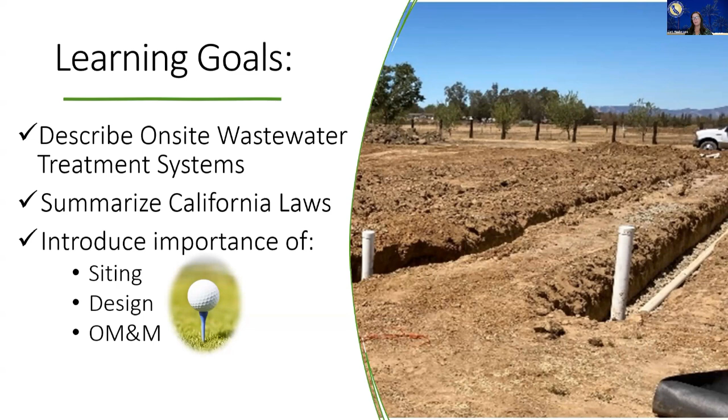So first of all, just quickly, what are they? They are, quite simply, wastewater management systems built to protect people and the environment. They collect wastewater safely. They treat it to a proper standard before discharging it and dispersing it back to the environment as clean water. And as you can see, we have quite a bit of them in California.

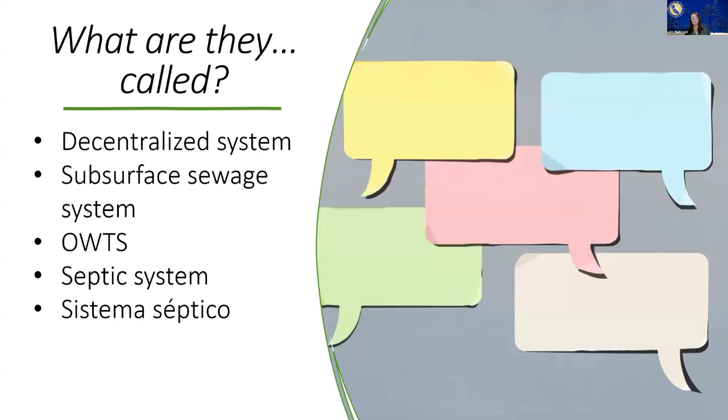And what are they called? They have many names, and this list is not inclusive. But I wanted to let you know that no matter what they're called, they all mean the same thing. Septic system is probably the most common. The acronym OWTS is even pronounced in different ways - OWTS, OOTS, OUTS, OATS. I've heard lots. I pronounce it as OWTS. So you'll be hearing a lot of these different names for this training. But the name on-site wastewater treatment is probably the most accurate description of what they are. In the following slides, I'm going to break down this name to help you better understand what they are.

On-site wastewater treatment systems (OWTS) are designed to collect, treat, and discharge wastewater on the same property that generates that wastewater. They're usually found, as the picture implies, in very rural areas not served by community sewer systems.

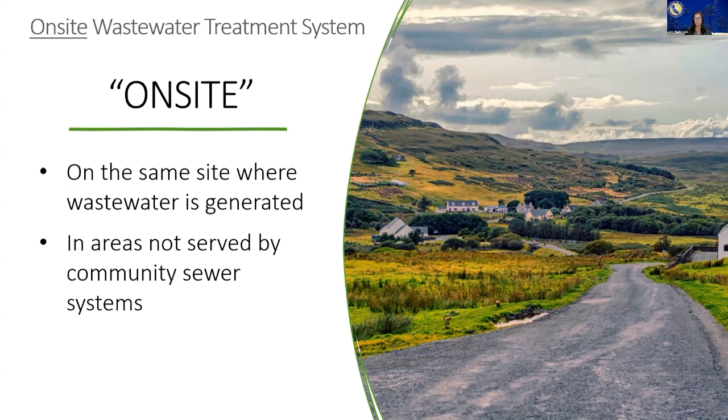Wastewater has been defined as any water that's been adversely affected by human activity. It's anything going down the drain, and it has pollutants - solids, liquids, and pathogens like bacteria, viruses, or other microorganisms, and chemicals like nitrates and cleaning products. All wastewater is water that needs to be treated, and if it's not treated properly, the pollutants can adversely affect the health of the environment and of people.

Finally, it's a treatment system - a built system using media, bacteria, and microorganisms to treat and clean our wastewater to a safe standard. So it's really the ultimate reduce, recycle, and reuse system.

Let's take a look and follow wastewater through the system. First it collects in the tank where it settles into layers, and then the cleaner liquid product is moved into the field, and we call that effluent.

At the field, there's lots of names for this - leach field, dispersal field, discharge field, absorption field, all mean the same thing. It's usually made up again of a series of trenches, and the field is a built component where the effluent leaves through pipes through the holes, and the treatment continues in those trenches. It uses media, bacteria, and microorganisms here, continuing to filter out the pollutants.

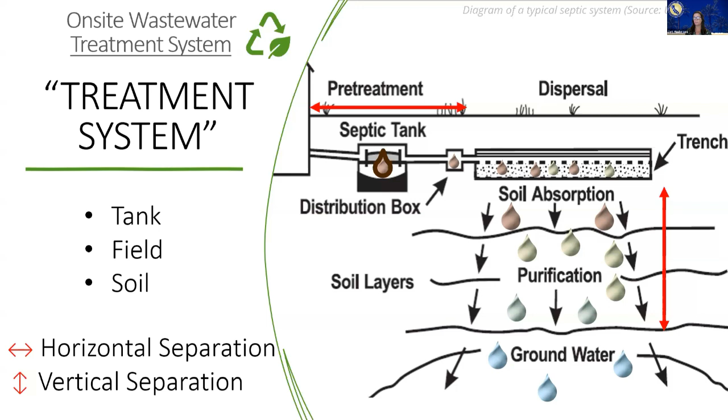Let's look again at this standard conventional gravity system. It is the easiest and usually the cheapest of all systems. Given the vertical and horizontal setbacks shown on this site, this type of system will work effectively and the wastewater will be treated. But let's consider some possible site limitations or challenges where a standard system such as this will not provide adequate treatment.

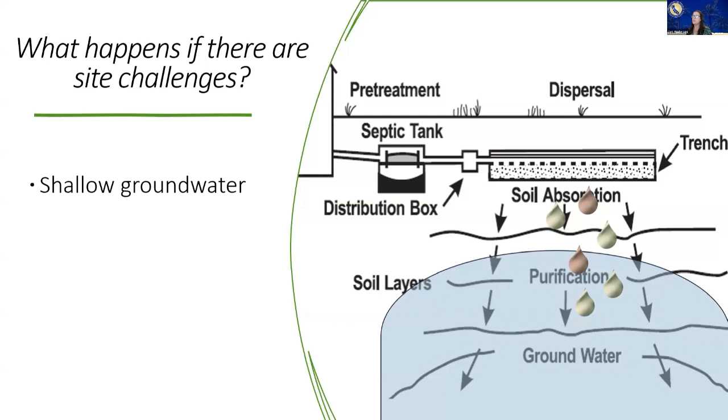What if there's shallow groundwater? Well, you can see here that untreated effluent will then impact the groundwater.

What if there's sandy or rocky soil and the wastewater percolates too quickly through the soil? Then the untreated wastewater can impact groundwater and drinking water without being treated to the proper standard. These are two examples that give you an idea of the importance of the site and soil evaluation. What happens at a site when this standard conventional system may not be enough to provide adequate treatment? What can be done at these challenging sites?

So there are different types of OWTS and designs that can account for these limitations. And if they're installed and operated properly and correctly, and monitored, then they will provide proper treatment. So it's important to identify those site restrictions prior to any kind of design.

So if you guys aren't still with me, I threw in this image, wanted to make sure you're paying attention, but also I want you to consider different OWTS designs as possibly building an ice cream cone with different flavors. The easiest, most basic system, that standard conventional gravity system shown on those previous slides, could work if the site has no setback issues and great soil. This system would be a simple one-scoop vanilla cone, just vanilla. But if the site has many challenges and features, a more advanced ice cream cone may be needed with different flavors, and sometimes chocolate sauce, toppings, sprinkles.

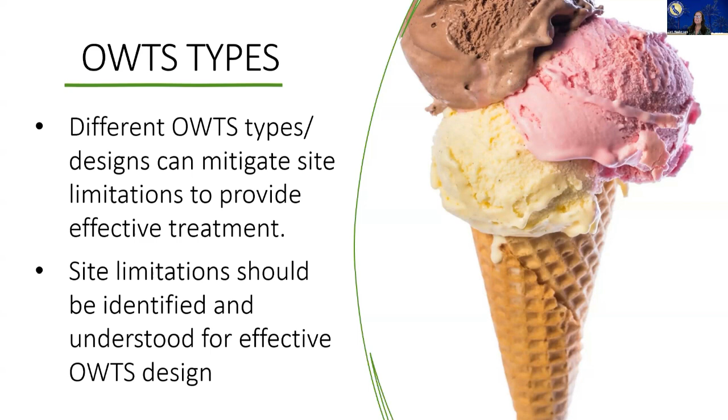So how do environmental health specialists protect environmental public health? Well, first and foremost, we enforce applicable laws and regulations. And in order to enforce those laws and regs, we need to understand and apply the principles of an OWTS, and then also, most importantly, to educate. We want to make sure that our message is consistent and a quality message, and we want people to do the right thing when we're not looking.

So what are OWTS laws and regulations, and where do they come from? Who's involved? As discussed on the previous slide, we enforce laws and regs, but to understand these, let's briefly touch on the big picture. When a legislative act is passed, it becomes a law, and it'll be entered into a code. A government agency will then create regulations meant to implement that law. They interpret it and provide an enforcement framework. And as you guys know, state laws can be more restrictive than federal laws, and local laws can be more restrictive than state laws.

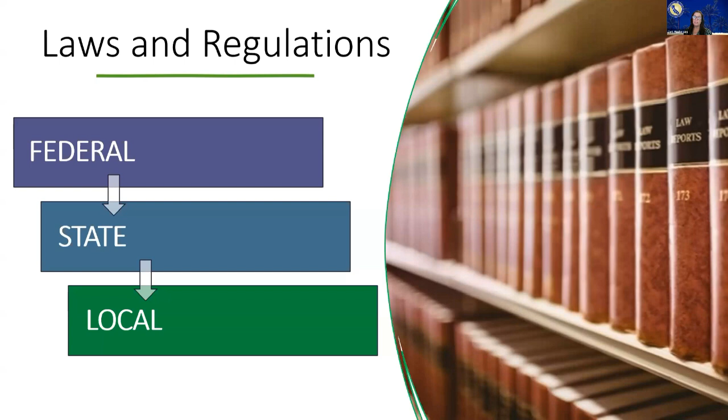So now let's quickly look at an OWTS example here. At the federal level, the 1972 Clean Water Act was passed, and the US EPA is the agency that regulates this at the federal level, authorizing state governments to permit, administer, and enforce the program. At the state level, California passed its own Clean Water Act, and the California state agency with enforcement authority is Cal EPA. More specifically, it's the State Water Resources Control Board, or the Water Board. The Water Board consists of 9 regional water quality control boards, regional boards. We'll be talking a little bit more about that later. The Water Board has regulatory authority over both surface waters and groundwater in California. And then at the local level, there is local enforcement of county and city laws called ordinances. Other codes may also support the program through enforcement of plumbing codes, general plans, etc.

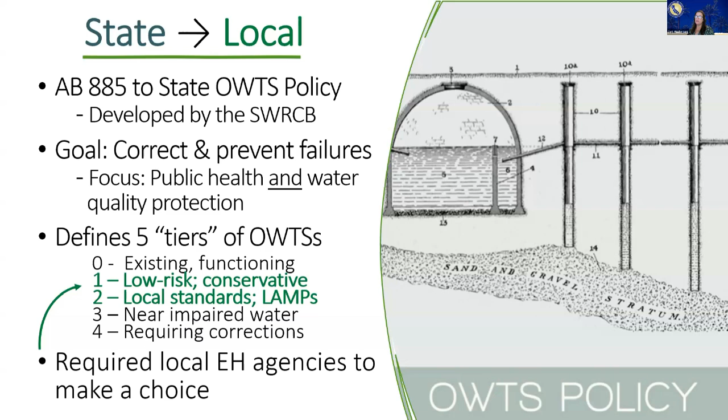Again, the state provided an option through their tier definition. The local environmental health could choose adopting general standards—systems with very general prescriptive default standards, the same for everyone. This means it's a vanilla cone system with no other flavors available. And if a vanilla cone won't work, then there's no ice cream for you. If a Tier 1 septic system won't work on a challenging site with limitations, then there's no OWTS for you.

So for example, if a site has shallow groundwater, a failing septic system on that site serving a house could not be replaced using the Tier 1 standards.

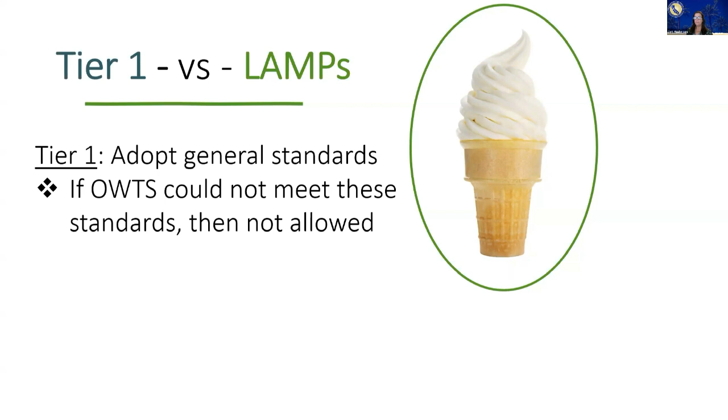Or they could develop a Tier 2 LAMP, which allows for alternative standards to be applied with overall assurance that the alternative system options will be as protective as Tier 1. So this means many different options, making many different ice cream flavors, if you will.

So I'd like you to consider just how diverse our state is. Nikki talked about this a little bit—different soils, different regions, different politics even. Now imagine telling everyone that it's vanilla or nothing. So you can understand why LAMPs are necessary to allow for continued protections. And the first LAMP was passed in 2015.

So LAMPs were developed by local agencies to provide system standards that are as protective as Tier 1. That's what makes them the same. But they may not look or act the same way across the state.

So it's based on the watersheds in that region. The water board or regional board then makes their water quality decisions and actions appropriate to those local differences. So what does this mean? Well, what works for one jurisdiction may not work in another due to local regional board reasons, such as climate, topography, geology, hydrology. So their LAMP would look different than in others.

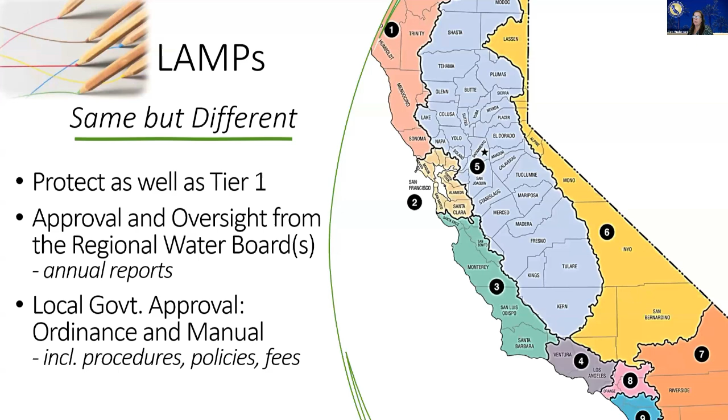So what does this mean? Well, what works for one jurisdiction may not work in another due to environmental health agency reasons, such as staffing, permitting processes, etc. So remember, it's a whole program geared to individual jurisdictional needs.

So some LAMP outcomes provide effective options based on site limitations or risks. A LAMP supports a regulatory framework that's unique to the jurisdiction it serves, providing consistent messaging that will support environmental public health locally. And now, actually, we just talk more to each other.

We reach out to our regional boards more. Our OWTS TAC is robust as ever. And even local septic contractors and designers often know more than we do about local conditions. So it really has strengthened the wastewater programs.

Quick story time before I'm done here, from my time working in Yolo County. There was a large property, 10 acres, a beautiful existing orchard, and the farmer wanted to build a new farmhouse to relocate his family from the city to the country property.

Given these pretty severe soil and vertical separation limitations, if we didn't have an approved LAMP, then an OWTS would not have met Tier 1 here. In other words, a vanilla cone system just could not work.

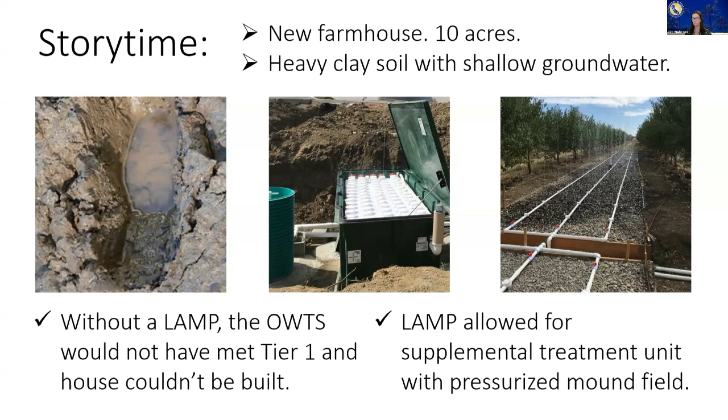But because we had an approved LAMP, the installation of an advanced system was allowed using a supplemental treatment unit, shown here in the middle picture, to a pressurized mound system shown to the right. That's actually the squirt test before we cover that mound. So LAMPs are effective and they are very important.

Just briefly in summary, understand that we know OWTS can prevent disease and protect the environment if they're done right. OWTS have many names and looks, but the principle remains the same. They use natural bacteria, built systems, and the soil to treat wastewater before returning it as clean water.

And finally, remember that every LAMP is going to be unique to that local jurisdiction. As an inspector, I would often be asked, why do we need that fancy septic system? Why can't I have that basic standard system I've used for years? I would simply answer, we are determining the best system for your site so that it will work for a long time and keep you and your family safe, but it will also protect the waters of California and public health.

And in this message, all jurisdictions are really the same. Thank you, that's it.

All right, next up we have Mr. Craig Paul going over basic on-site wastewater treatment system design factors. Take it away, Mr. Paul.

All right, well, so yeah, we're going to start out, as Deb did a good job of explaining, every system has to be tailored to its site. And what we're really looking at there, I guess I should actually back up just a little bit.

So many of you don't know me. I've been in the industry for almost 20 years, but that's been in various states, not just in California. So I'm currently in California, love it here. But my experience travels basically coast to coast and a little bit in the middle of the country. So sometimes I'll use words that may be a little different than what you'll know, but as Deb went over, they all mean the same thing.

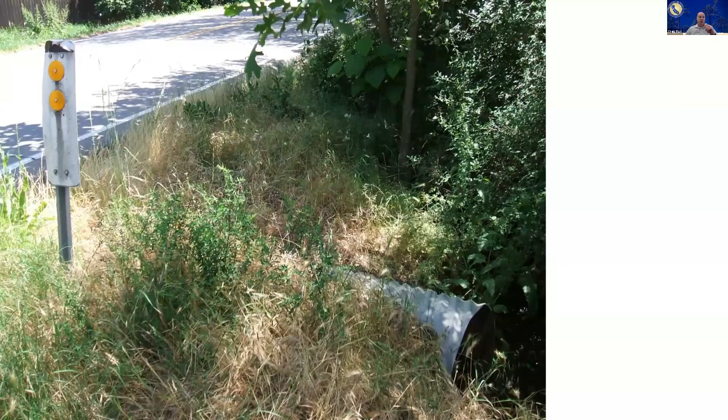Another thing you should do is use your ears. This right here is a perfect example of keeping an eye out. You can't really see this from the road if you're driving by, but you can probably hear it, you can hear the water moving through. So if you're not sure, go take a look. It's better to walk around that property and make sure your site is clear of any impacting use that's not compatible with that on-site wastewater system before you get too far down that path. Now, site evaluation itself, what are you looking for?

One, avoid areas that are going to collect water. As Deb talked about, the whole point behind the septic system is to take water, clean it up, and put it back in the environment. So you don't want to put a whole bunch more water where there already is water. Convex landforms are good, concave is bad. We're looking for somewhere that can accept more water, that has additional capacity. Remember, every spot of ground can accept a certain amount of water in a certain amount of time, and you don't want to overload it or create a problem where there already was water.

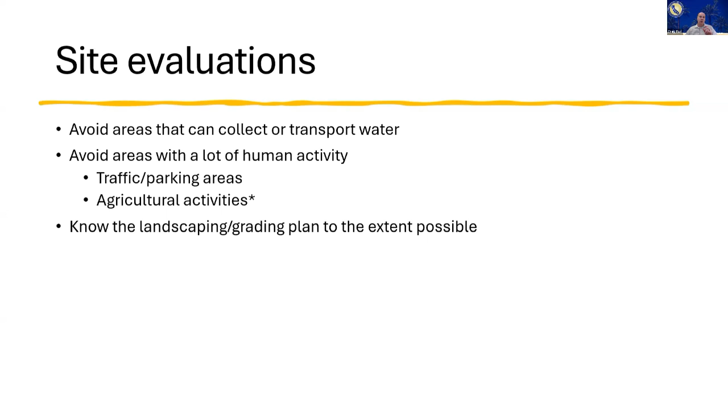All right, we've talked a lot about soil. What is soil? A lot of people are surprised to find out that soil, everything we walk on that we think is nice and firm, is actually about 50% open space, pores. That open space is filled with air or water or a mixture, depending on whether it's dry or wet. Could be 100% water, could be 0% water. 0 is pretty rare, but usually it's about 50-50 most of the time.

Not always, but usually. This is also why compaction matters, because when you're talking about compacted soil, what's happening is you're smashing those pores. That open space becomes smaller. You're squishing those pores, which is going to slow down the water so that it can't move through.

We also care about the solids, and usually the solids are about 5% organic matter and 45% mineral. That percentage can vary location by location, but we care about those solids as well. We're not just caring about the pores that allow the water to move through, but the solids are what actually remove those contaminants—chemical contaminants, viruses, or bacteria. They do it through adsorption, absorption, biological processes. There's a lot of ways in which the soil is going to clean that water so that once it does hit that water table or surface water, it's cleaned up and good for reuse.

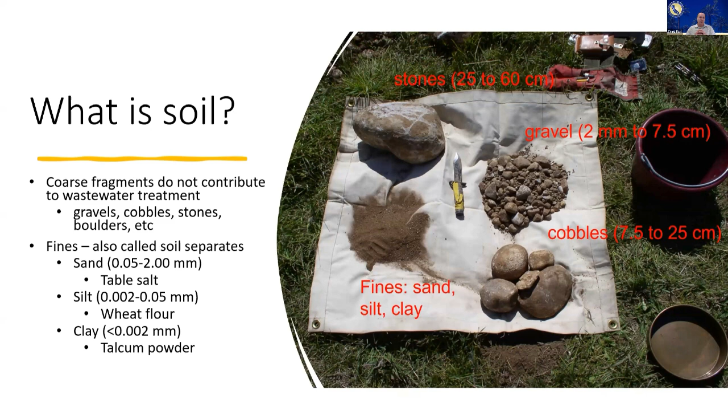Well, why do we care? Why are we using the Department of Agriculture texture classification? We do that because it divides soils according to how they affect water and nutrients, because it was built for farmers who care about watering their crops and getting the water and fertilizers where they want. That's really what we're looking at with effluent—how the water goes through, and how those nutrients move. Farmers call them nutrients; we call them contaminants we have to get rid of, but a lot of them are essentially the same thing. That's exactly what we're looking for. So that's why we use the USDA system, because it's what works for us.

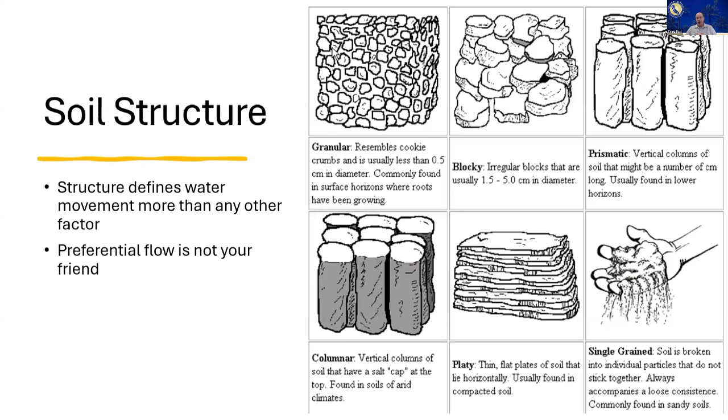Preferential flow is not our friend when we're talking about wastewater systems because of that bypassing. Now, all of these different structures are going to have a different effect - generally speaking, granular is good. There's a lot of contact between soil contaminants and soil particles to clean it up. Platy is not so good because it doesn't allow water to go down very well, it goes sideways. But you should be aware that soil structure plays a big part in how we look at the soil. Why does it matter if this soil goes all the way down? Well, I've got rock under me - but keep in mind that rock allows water to move through too, and it doesn't clean anything great.

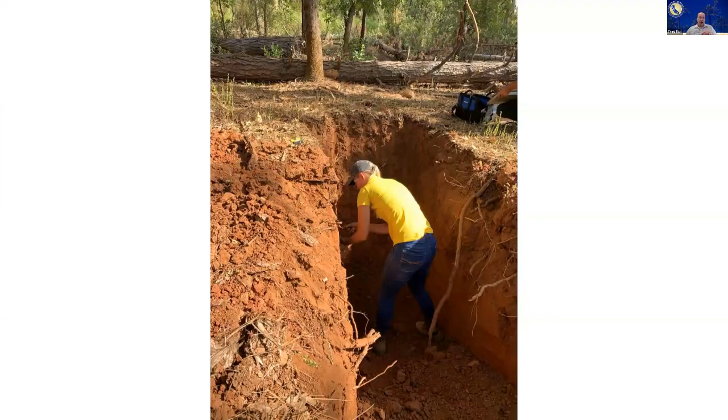You have to dig. Again, we're going to talk about safety - be safe as you're out there, you don't want to get injured, you don't want to get trapped in one of these holes. So assuming you're safe, you get into the hole - what are you looking for? Well, you're looking for soil texture, soil structure, and soil color, in that order. Texture first, structure second, color last.

The point of this whole exercise of looking at the soil is to try to estimate how fast the water, or in our case, effluent, will move through the soil. We call that percolation rate, absorption rate, acceptance rate - they're all the same thing. And the unit for that rate is minutes per inch. That's the intent behind the whole point. We want to figure out how fast water will move through here, because we want to design a system which is appropriate for this property, appropriate for how quickly the water will go through. How do we know that then? Well, first, we start with texture.

How do we estimate texture? Because it's sand, silts, and clays - you can't even see those things most of the time, they're just too tiny. Well, there's a couple of different ways to do it. One, you can estimate soil texture by feel. This is a USDA process, it's been field tested and looked at a lot.

Essentially what you do is you take a sample of the soil, put water on it, squish it all up, mix it all together so you have a nice Play-Doh consistency, and then you make a ribbon. You just follow through this whole flow chart, and it comes out with a soil type, a soil texture estimate. So pros - well, it's pretty quick, pretty simple. You don't need a lot of fancy equipment, you just need some water in your hand.

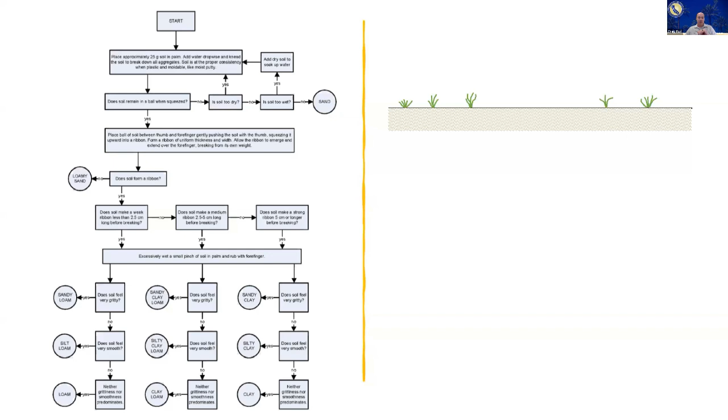What's a perc test? Well, first you find a spot where you're going to put that drain field. Keep in mind, if you're going to do a perc test, you still need to dig the hole first because you need to know how deep to go.

How deep do you dig your perc test? You agree upon that depth with your soil consultant. Essentially, you want the bottom of that perk test to be about where you expect the bottom of the leach field to be. Usually your LAMP may be different. Please follow your local ordinances and local LAMP. Talk to those people who have been around for a long time.

So how deep do you dig the hole? However deep it needs to be to accurately represent the bottom of that leach field. How wide is it? Well, this can vary, anywhere from 6 inches to 24 inches. So take a look at your LAMP, your local area, and however wide it needs to be.

Now, the next step in doing a perk test: remember, as you dig, if you're dealing with certain soil types, you'll get what's called smearing. Construction on a perk test is critical, and this is one of the areas where perk tests can be a problem. If you have smearing, which happens in clay soils, like if you dug with a shovel in clay soil, you'll notice it just kind of makes a slick side. And the problem with that is now you've closed off all the pores and the water just can't move out. And that's not realistic. That's not what we're trying to get at.

That's not what we want to look at. So when you dig the hole, you need to look at that after it's dug, and you need to make sure you've raked up those sides to break it back open so that you don't have a perk test that's going to show too slow than what reality is. You also need to do that to the bottom as well.

And then sometimes you put in gravel. Some people don't - follow your local procedure. The gravel is only there to keep it so that when you pour the water into the hole, it won't mix up at the bottom and cause sedimentation, which will fill up pores.

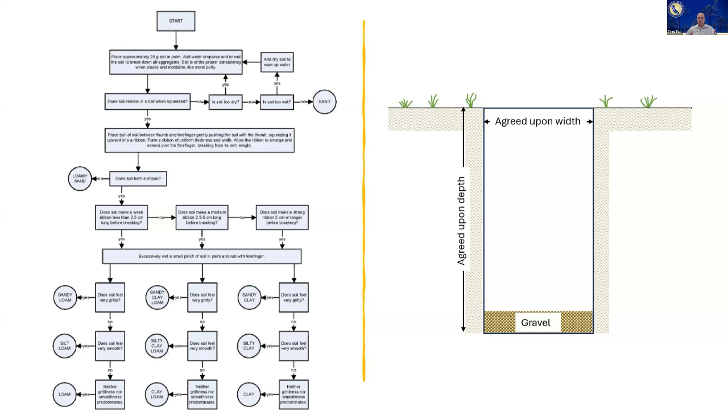And then you put in water. Again, follow your local procedure. Usually this water stays in for at least overnight, sometimes 24 hours. The reason is because soil when it's dry will soak up water faster than when it's wet. We don't really care about what happens when it's dry, because we're looking for a leach field, which is going to receive water periodically throughout the day. We're looking more at a worst case scenario: what's going to happen when the water's on there for a long period of time rather than dry.

So you need to keep that water. Now, obviously, sometimes you can't - if it's a really sandy soil, that may be impossible, but follow your local procedures for that.

Assuming you've had water in there for however long you needed to, overnight or 24 hours, then you go out, fill the water up to a known depth, and measure it. You measure the depth of that water, then check it periodically and time how quickly the water will go down. This is where you get those minutes per inch - the number of minutes it takes for the water to drop an inch. That's where you get your perk test, your perk rate.

So you can either estimate a perk rate by estimating your texture and then using a table, or you can measure it using a perk test. Neither is better than the other - they're just different, with different pros and cons. Ideally they're used in conjunction. Some places prefer one, some places prefer the other - really up to your local ordinance.

Now, one of those things - I'm going to give you an example of why we dig these holes. You can't just dig a perk test to whatever depth you think. For example, what happens if you dig a hole and there's water?

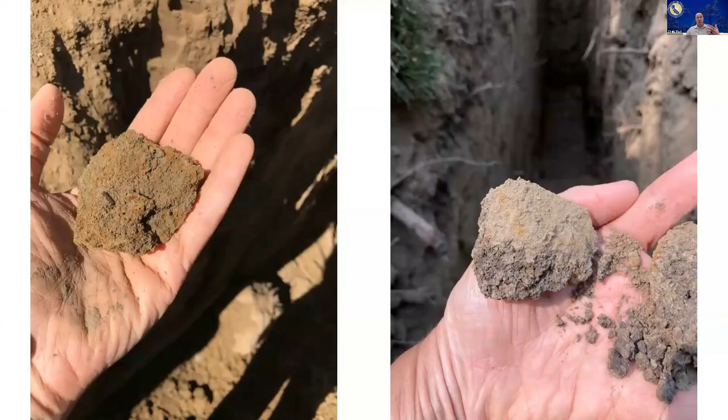And this is where that color thing comes into play. You've looked at soil texture either by feel, you've looked at your test hole, you've looked at percolation, you've looked at soil structure, and maybe done a perk rate, which tests both texture and structure. Now we're getting into color.

Soil, generally speaking, if there's no water around, is going to be some sort of brown to red color. It could be black if you've got a lot of organic matter, but that's pretty rare. It can happen, but it's pretty rare.

But if you have a lot of water present, that water will actually change the chemistry of the soil minerals and create these gray colors called gleying. Usually that's how you can tell. You can see in these pictures some pockets of bright reds, but also more muted colors, and on the one on the right, very gray colors.

So take a look at this. If you start noticing this sort of color variation, you should stop and take notice. It doesn't necessarily mean there's water, and there are other possible explanations, but it could mean there's a water table in this area.

So if you see this mottling and suspect it's from water, and you don't have any other reason why it could be there - another reason, for example, would be that sometimes granites weather into soils that can look like this just because of how the rock looked.

So if you find these sorts of things and think it might be because of water, that's where you need to start doing water table monitoring. Nobody wants their project put on hold for water table monitoring, but nobody wants to contaminate the soil either, or their own well, or their neighbor's well, or the water. So there are a lot of different reasons why this could exist.

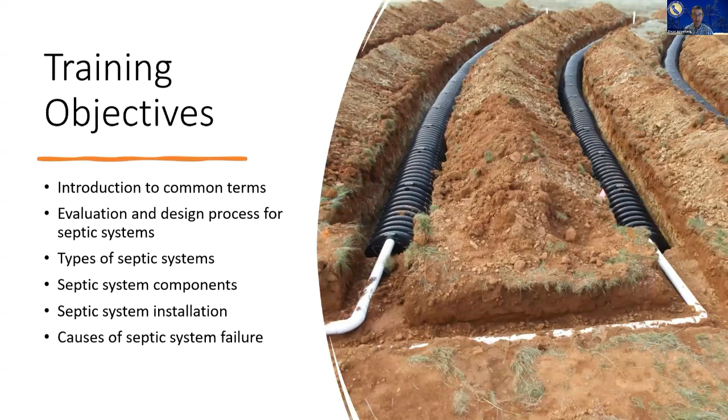One term I'd like to reiterate is OWTS. I'll call it an OWTS. You might know it as a septic system, and this includes all of the different components: the septic tank, tight line, and leach line.

Another term is effluent, which is treated sewage that has exited a septic tank. I may refer to it today as wastewater or call it liquid wastewater.

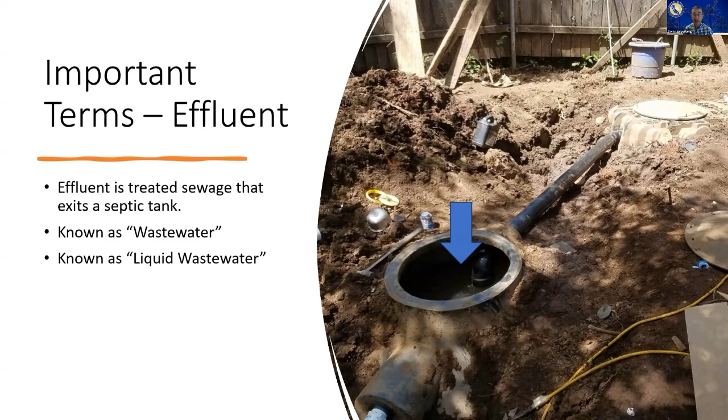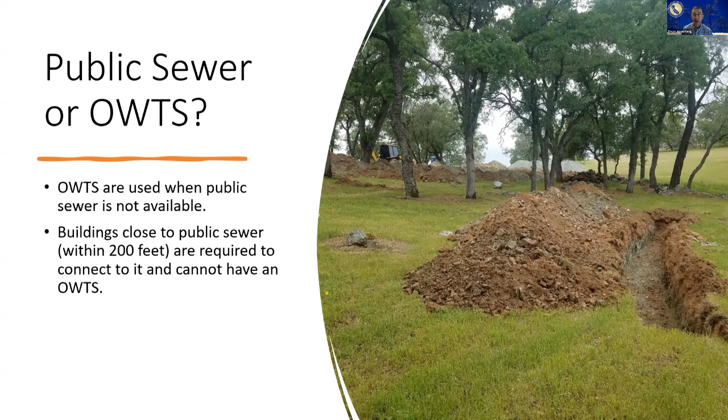So you may wonder, can every property have an OWTS? In El Dorado County, at least, the answer is no. If public sewer is available, and in El Dorado County if it's within 200 feet, you're required to connect to public sewer in place of using an OWTS.

Now let's move into talking about the process a little bit, where we have site evaluation, and we're going to determine where a parcel can actually have a septic system, soil evaluation, how to design a septic system, how to install it, and then also, again, always check your local ordinances because they can vary between counties.

In El Dorado County, we have certain qualifications for who can design a septic system, and that would be a geologist, a civil engineer, or a registered environmental health specialist.

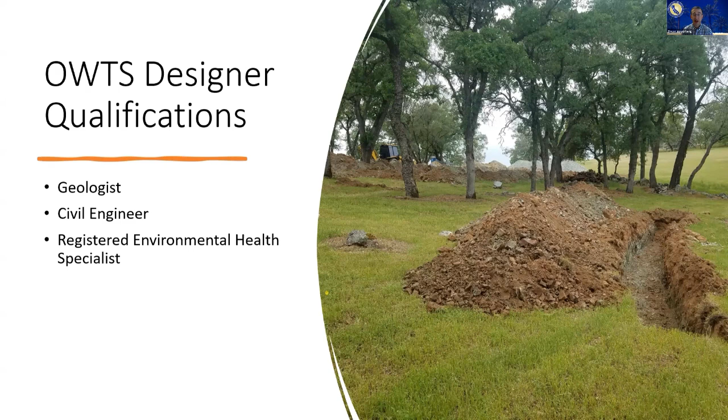On the other side of the coin is who can install a septic system. We require a person to have a Class A, Class B, C36 plumbing, or C42 sanitation system license. In some cases, a homeowner may be able to install the septic system themselves, but that always depends on the jurisdiction.

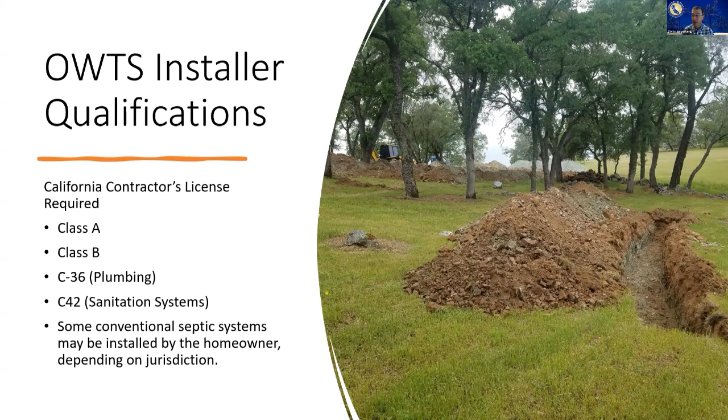Any new septic system is going to be installed in conjunction with a building permit, which is a little different than if you're repairing a septic system that already has a house associated with it.

So I'm going to move through a few different sections: site evaluation, design of septic system, and installation. To help keep track of where I'm at, I've got little gray boxes in the lower left-hand corner here.

So we're going to start with site evaluation, where we're going to determine where the OWTS should be located and find the best spot for it.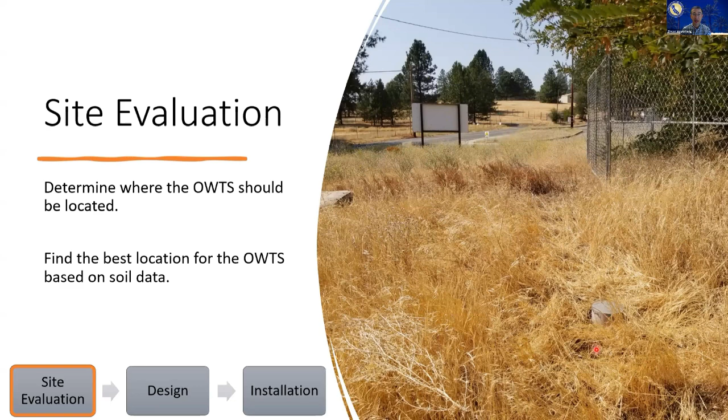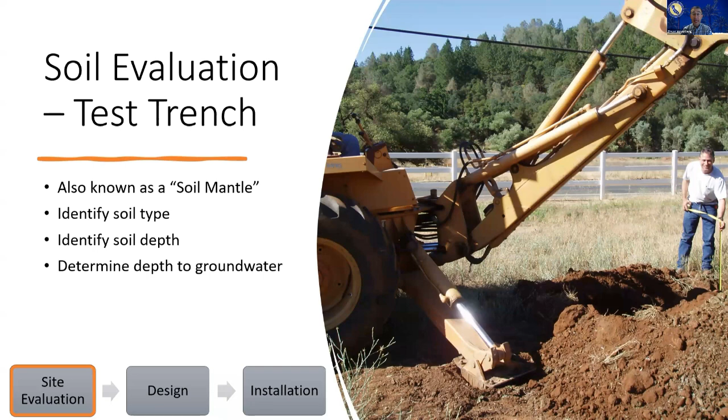As Craig talked about, you want to see what you have to work with on your property, and you'll do that by digging a hole. This will also be referred to as a test trench, and you also might know it as a soil mantle. It's going to help you identify the soil type, how much soil depth you have, and if it's there, the depth to groundwater, which is all going to link into your setbacks.

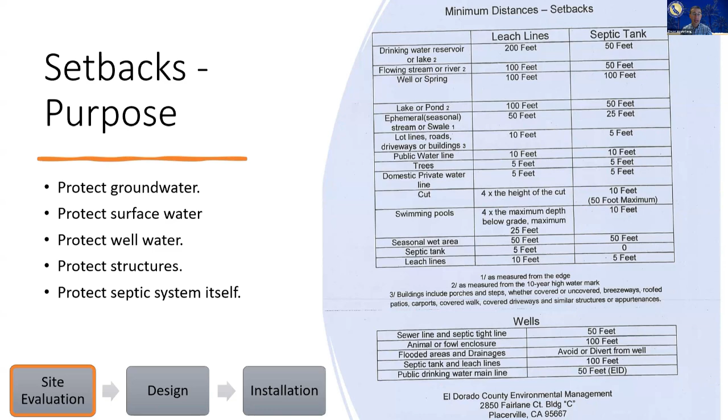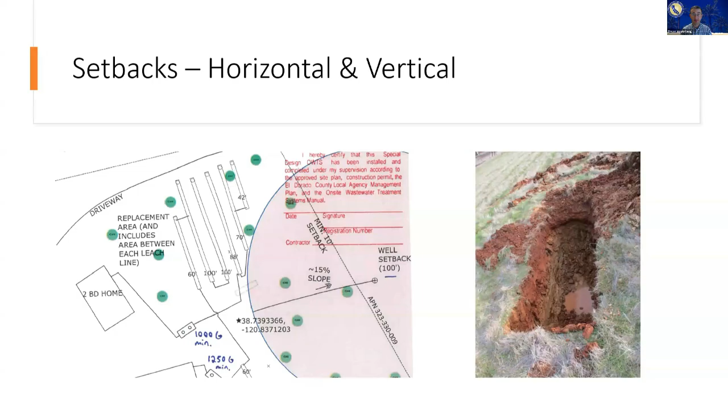And on the right, we have a vertical setback. So we have groundwater just a few feet underground, and we'll want to keep our leach field a certain distance away from it. In El Dorado County, and this may vary by jurisdiction, but we have a minimum setback of 5 feet between the surface of the ground and the groundwater level.

This is an example of wet season testing that was done when there is a higher groundwater level. We'll talk about it later, but there are specialized types of OWTS that can treat the sewage and remove contaminants to allow you to reduce that distance between your septic system, leach line, and groundwater.

Rarely you might encounter something called a limiting layer. In the photo on the right, you can see grass, reddish soil, and then yellowish soil. If you look closely, this yellowish layer of soil is dry, and above it, the reddish soil is wet. You can actually see it dripping down from one layer to the next. This is an example of a limiting layer that's preventing water on the surface from percolating down further into the soil. And if you have a leach line or a dispersal area there, it's really going to be impacted by that limiting layer.

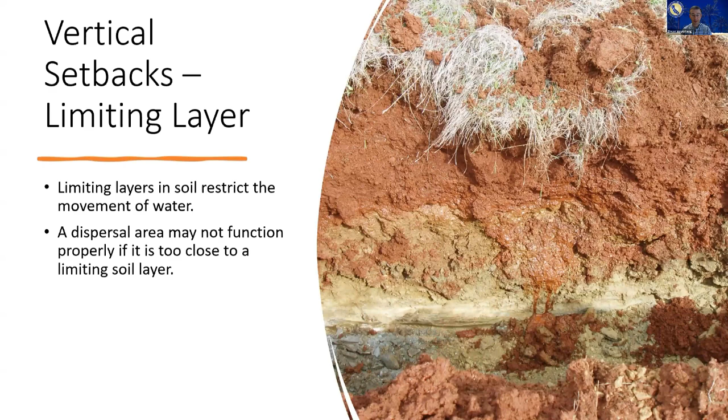Now we're going to move into septic system design. This is where our evaluation, soil testing, and our project requirements are all going to be put into one thing. I've got a photo here on the left, and I'd like to give credit to Wheeldon Geology, who allowed us to use some of their designs as part of this training. So we have a complete septic system, including our house, our septic tank, tight line, leach lines, where our test trench was done, and also where percolation testing was completed, and our septic system repair area.

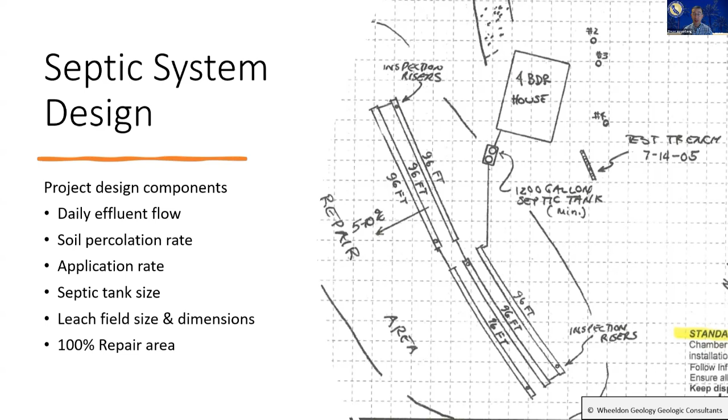So the components of septic system design are going to be our daily effluent flow, how much wastewater is our project going to produce each day, our soil percolation rate, like how quickly water or wastewater will move through the soil, the size of our septic tank, and our repair area that we'll need for the project.

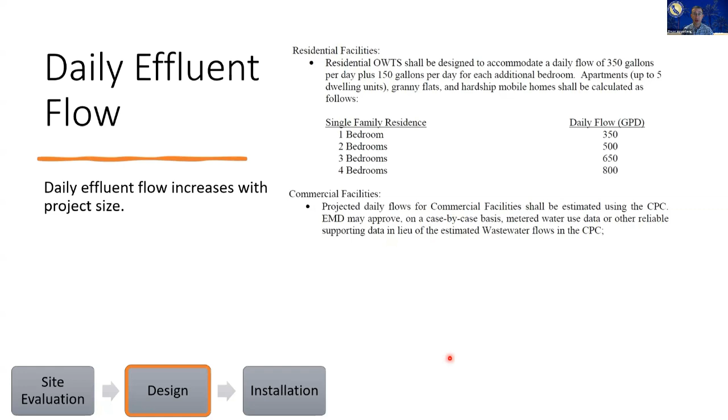A good example of that would be a food facility, which has high wastewater production from all the dishwashing and such that goes on. An example of a commercial facility with low wastewater production would be a warehouse where there's low water usage.

Same idea for your septic tank size. The bigger your house is, the more bedrooms you have, the more people will potentially be living there, and the more capacity you'll need for your septic tank. The reason for that is the septic tank is designed to treat a certain amount or volume of sewage each day. And if you have too much wastewater moving through it too quickly, it won't have time to treat that wastewater, and those contaminants will make it out into your dispersal area and can damage it, especially if you have things like grease in your wastewater.

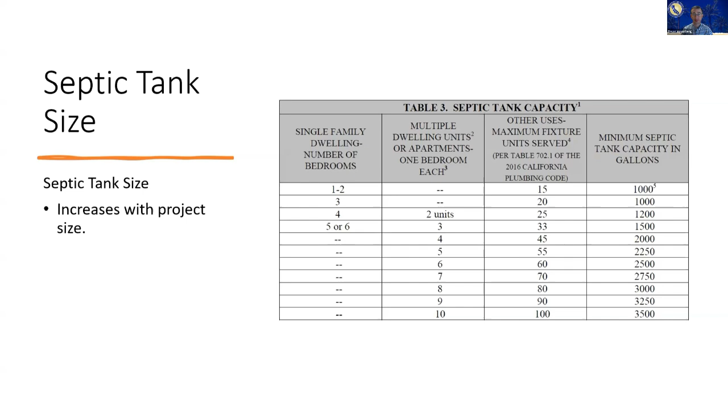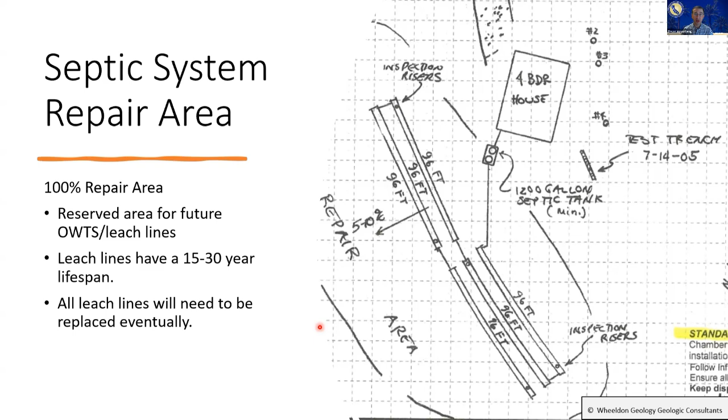And then finally, the designer picks an area that's going to be the repair area. This might be the most important part of the septic system because all septic systems have a lifespan, usually 15 to 30 years if you're really careful with it. It's going to be reserved for future leach lines. So if you're building a house, you're going to want to live there forever, and if you can't dispose of your wastewater, it makes it really difficult to use your property that you've developed.

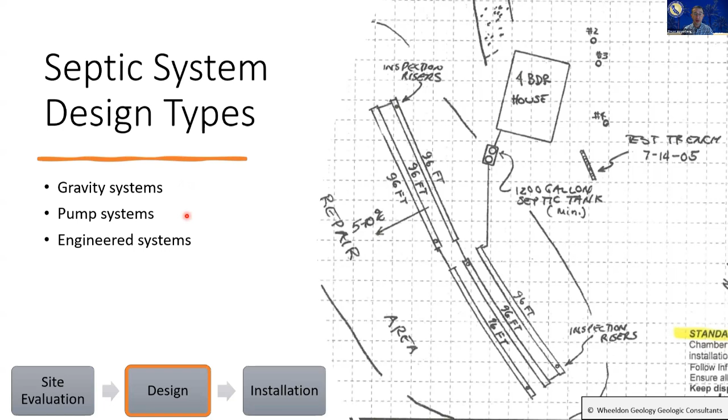Now for design, I'm going to move into a few different types of septic system designs, and those are gravity systems, pump systems, and finally engineered systems.

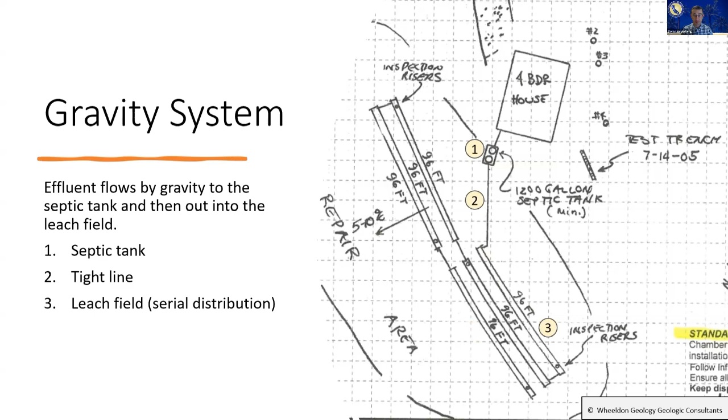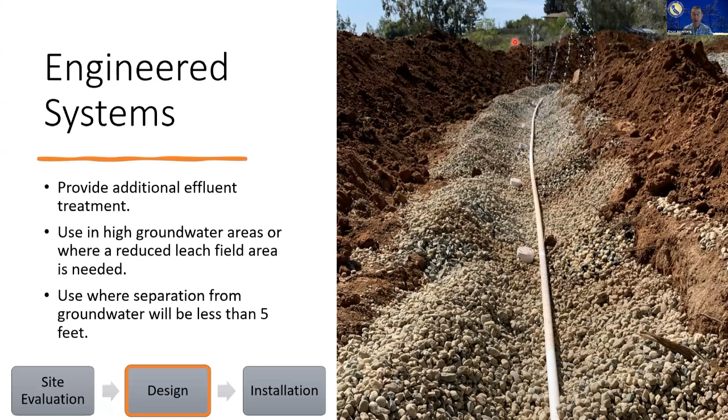Now, if neither a gravity system nor a pump system works, you can do something called an engineered system, which Craig talked about some. This provides additional effluent treatment, and you'll use it in areas where you have high groundwater, or maybe you need reduced leach field area, and especially where you have separation from groundwater that's going to be less than 5 feet. Pictured on the right is a pressure dosed system. If you look closely, you'll see rock and a small diameter white pipe, and it's actually pushing little jets of water up into the air that you can see. So that's a pressure dosed system, and it will push effluent out onto that rock bed.

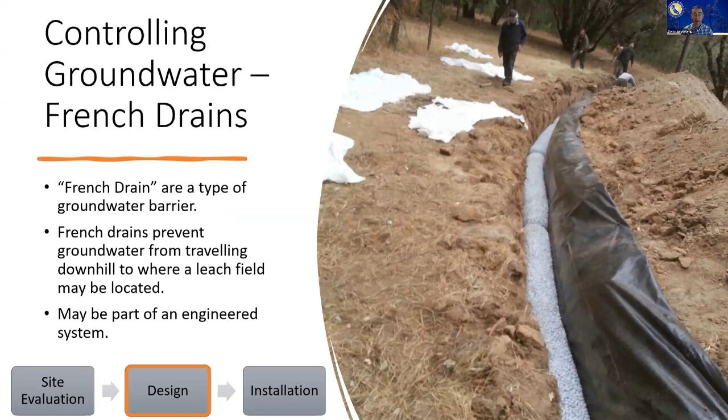Now let's move into septic system installation, and I'm going to go over the different components themselves with photos next, including septic tanks, tight line, distribution boxes, leach lines, and observation ports.

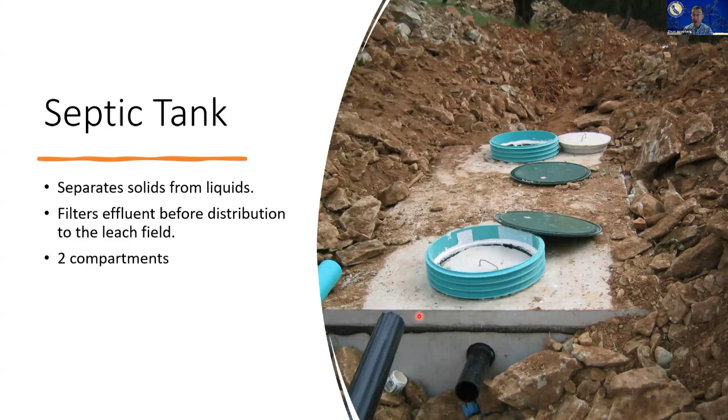Starting with the septic tank, it's the first part of the treatment for your septic system. It's going to separate solids from liquids, and it's also going to filter the effluent before it goes out into your leach field. They're typically composed of two compartments. On the right, you'll see a picture of a concrete septic tank, but they can be made of other materials, which I'll show you.

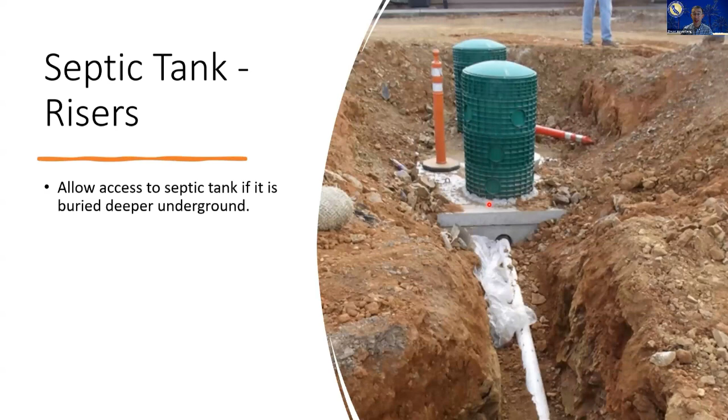Sometimes you have to put your septic tank pretty far underground in order to get all the plumbing to work correctly. If you do that, it's difficult to get to and difficult to service. So you can put things called risers onto the lids of the septic tank. You'll see here these green tubes - these are risers, and they let you get to the septic tank even though it's deep underground.

If you cut one of these septic tanks in half, here's what you would see in the picture on the right. You have 2 sections, and it has a baffle in between. On the left, you have your solids. On the right, you have your liquid layer. Above, you'll have a layer of something called scum, which is water and suspended solids and maybe some grease and fats and things like that. Every 5 years or so, or more frequently if you're using it more, you need to pump out these solids so that the septic tank can keep working properly.

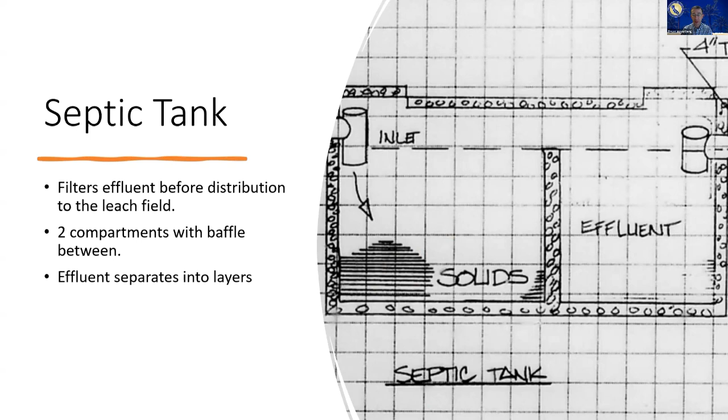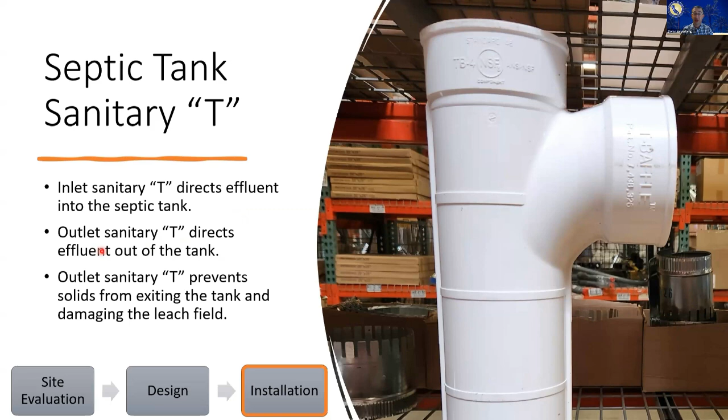Now, you may have noted these little T's on either side - those are called sanitary T's. This pillar in the middle is called the baffle. The sanitary T's are going to direct effluent into and out of the septic tank. If you're at a hardware store, here's what a sanitary T would look like. Your inlet sanitary T is going to direct effluent into the septic tank. Your outlet is going to direct effluent out of the septic tank.

The septic tank is also going to have a filter on the outlet side. If you look at it, it's got all these fine slots in it, and those are going to keep paper, hair, and large particles from going out into your leach field and damaging it. This is how you install a filter - it goes inside of the sanitary T. At the top, there's an arrow. I have this one backwards, but you want the arrow to be pointing outward to allow the effluent to go out of the septic tank.

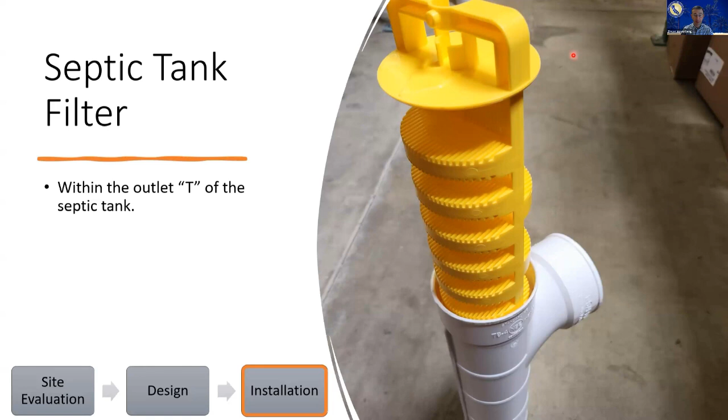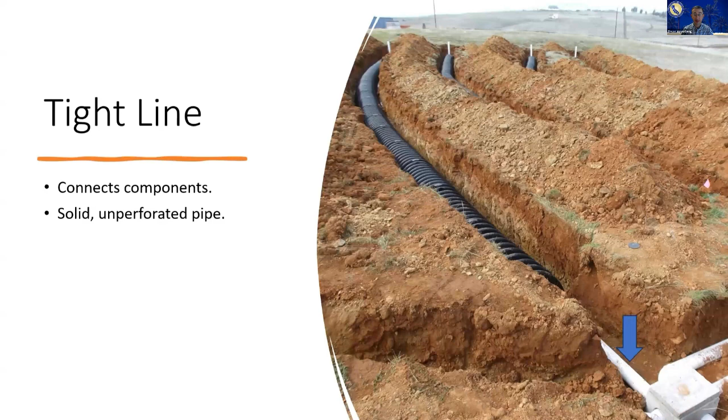Tight line is an important part of your septic system. It's going to connect the different components. It is a solid, unperforated pipe, meaning it has no holes in it. In the photo on the right, I have a piece of tight line going between my leach line and my distribution box. If you're at a plumbing yard, you might see pipes that are solid that say ABS or PVC on it. It's just going to be used to transport effluent from one part of the septic system to another.

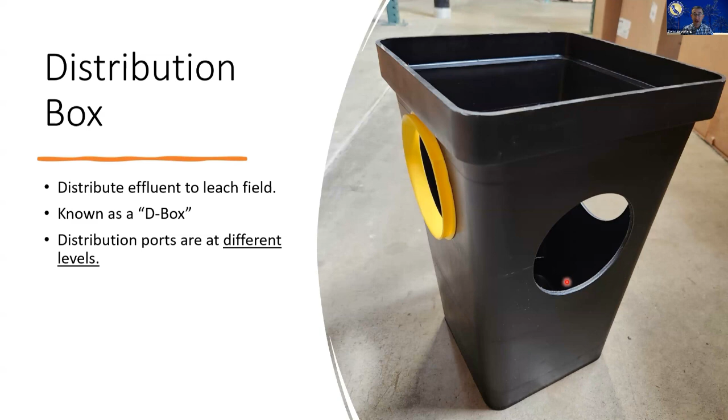Next is your distribution box. You might have heard of it as a D-box, and it's going to distribute the effluent into the leach lines themselves. Please note that the ports in the distribution box are at different levels. You may see something called a leveler - a piece of plastic that allows you to adjust in a custom way the level that your effluent goes out into your leach line. You might know it as a speed leveler. It's not required, but it can be helpful sometimes.

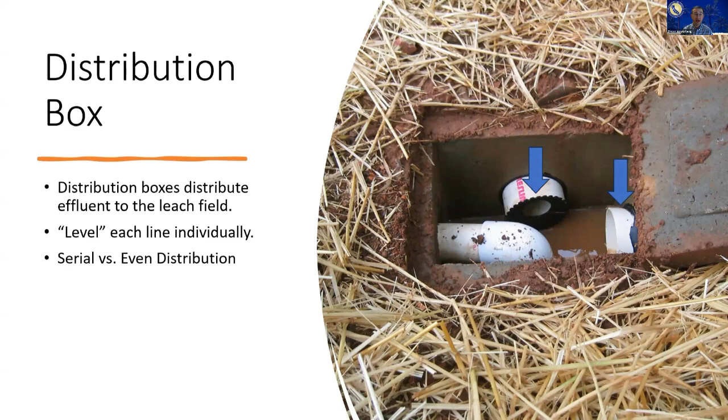In the picture on the right, I have a distribution box. To explain what's in here, you have this line, which is effluent coming into the septic system. The way this distribution box is set up is the sewage will go out this line first, and then when it fills to a certain level, it will flow into this second leach line next. This is an example of serial distribution, where it goes from one leach line to another. But as I mentioned before, sometimes you'll want the effluent to go to all of the leach field at the same time, and that would be called even distribution.

Leach lines themselves are going to distribute the effluent into the soil, and again, they're going to last 15 to 30 years if you care for them properly.

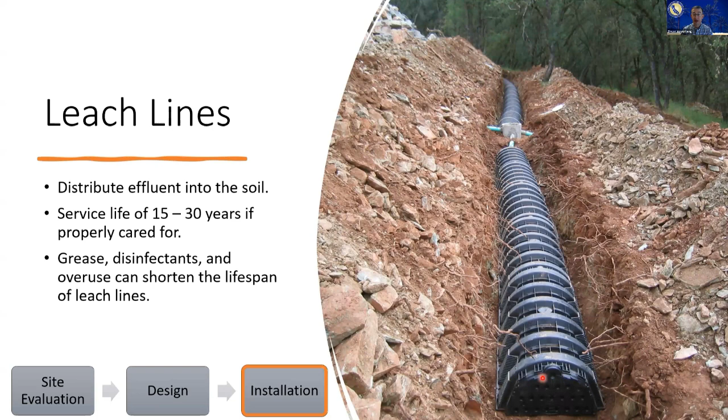But things like grease, disinfectants, or even overuse can shorten the lifespan of the leach lines. This is an example of that product I mentioned before called Infiltrator. But the most common type of leach line would be your rock and pipe.

So you have rock, you have a pipe, and it works pretty well. It lasts a long time. I'll show you a few close-up pictures of it next.

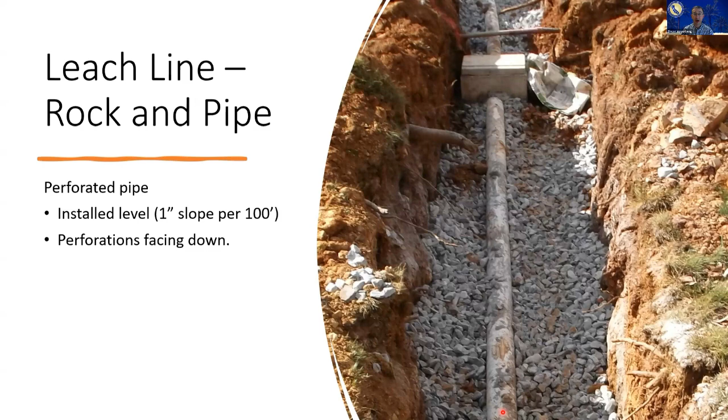So you have here a distribution box, and then this is perforated pipe. The holes in the pipe are facing downward, and you want to install it level so that the effluent evenly distributes over the whole leach line. In El Dorado County, our requirement is no more than 1 inch of slope over 100 feet.

Drain rock is what the pipe is over. It just provides surface area for effluent treatment. It has spaces in it where effluent can go. It's durable. Here's what perforated pipe looks like on the underside.

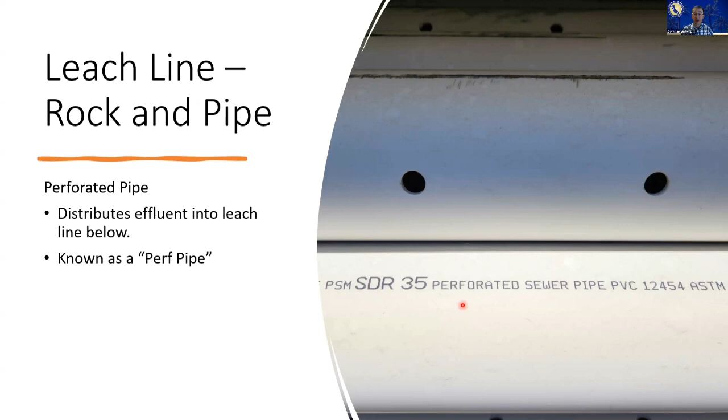You'll see it just has holes drilled at regular intervals, and contractors will usually call it perf pipe. If you look at what's printed, you might see it labeled as perforated sewer pipe.

And then finally, you put a barrier over the top of the rock so that fine soil particles don't clog up the drain rock below. That can be paper, or you can have filter fabric, or even straw sometimes.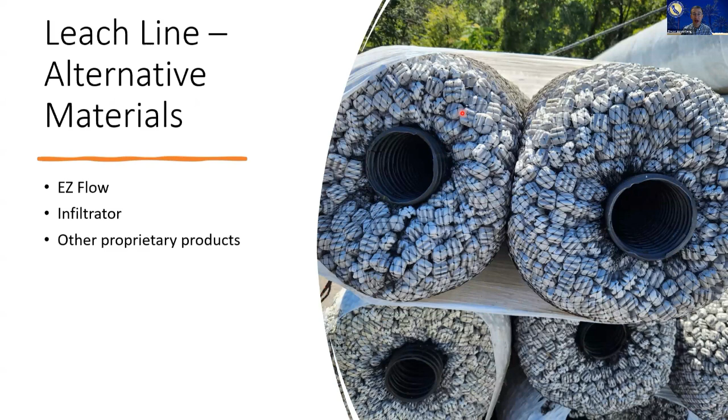If rock's not available, there are alternative materials. This is called EZ Flow. It's styrofoam peanuts that mimic rock, and there are several other products that companies have developed that do the same thing.

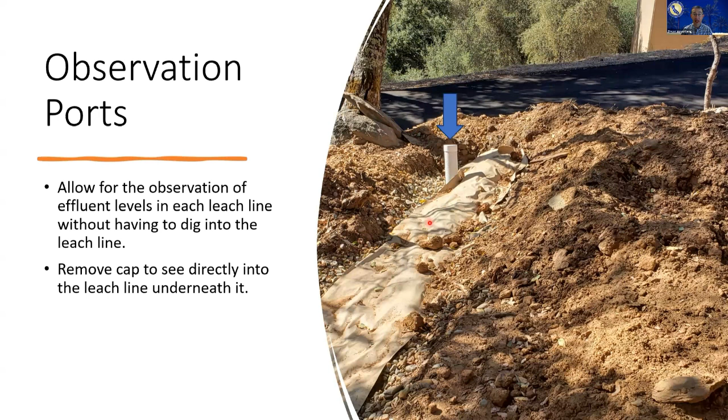And then finally, you have what's called an observation port, and that is a pipe sticking vertically into each of your leach lines, and it allows you to look into them without having to dig it up. They have a cap over the top that you want to make sure to replace when you take it off, so that your leach line doesn't fill with rain or anything like that.

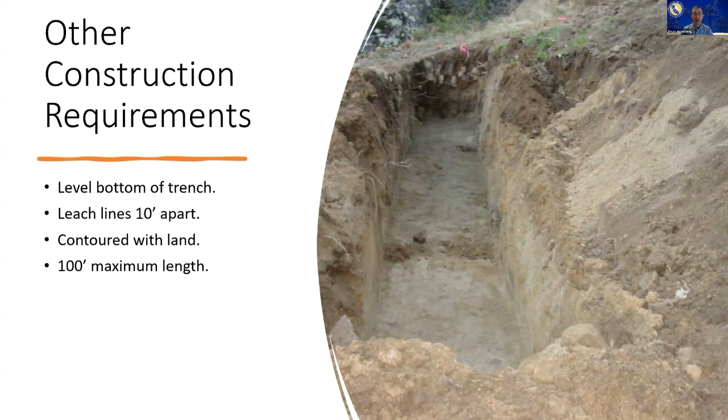Other construction requirements are a level trench to the bottom. You want your trenches to be 10 feet apart. You want to contour with the land - so if your leach line is on a round hill, you make your leach line round with it. And you want it to be a maximum of 100 feet, at least in El Dorado County.

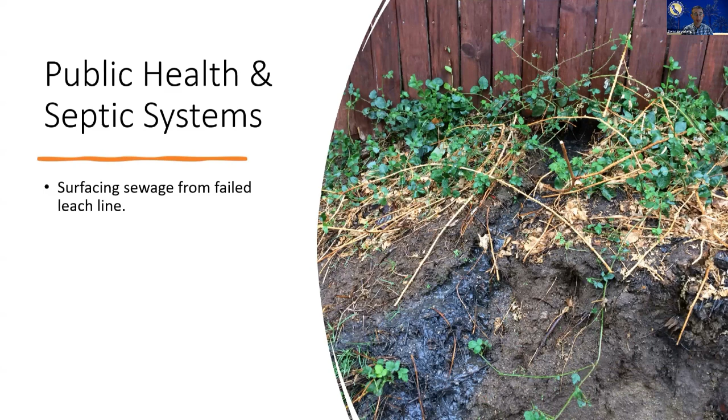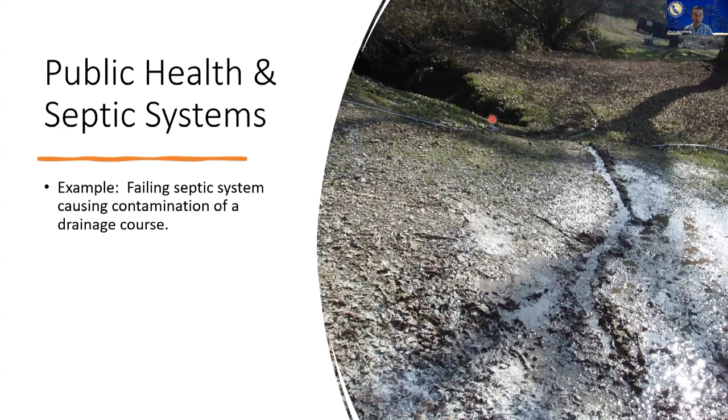Failing septic systems can cause groundwater and surface water contamination and pollute rivers and beaches. This same house with the failing septic system had the sewage going down into a creek and a drainage, so you can see how it directly impacts the environment around it.

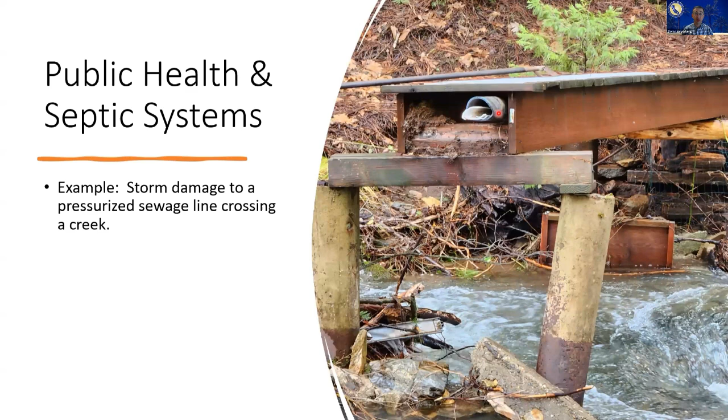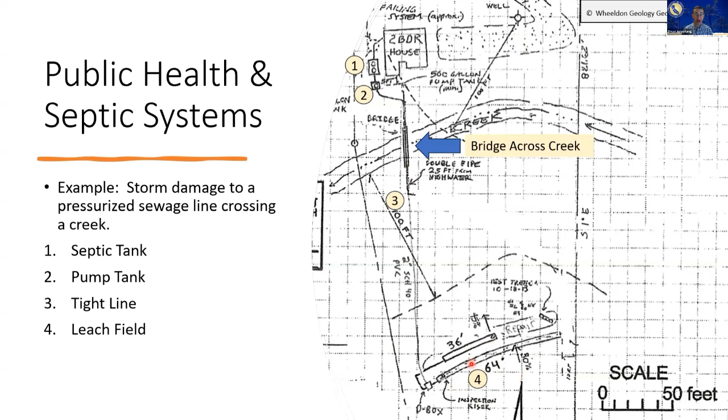And it was actually from the septic system I discussed previously, which pumped sewage across a creek up a hill to the dispersal area.

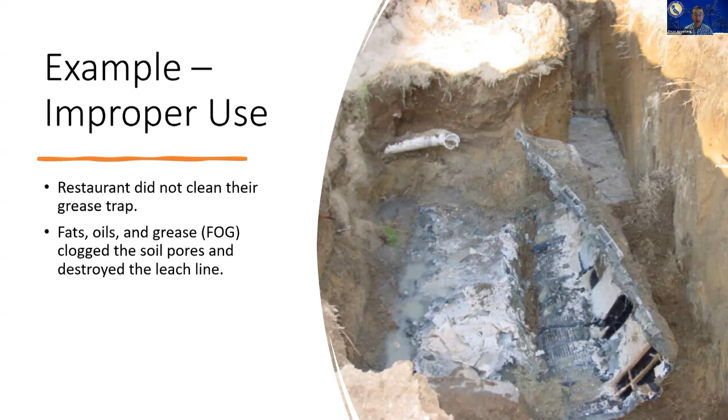And finally, here's a picture from a restaurant where you can really see all the grease and fats and oils that accumulated because the restaurant didn't clean their grease trap regularly. So this all had to be replaced with new leach lines.

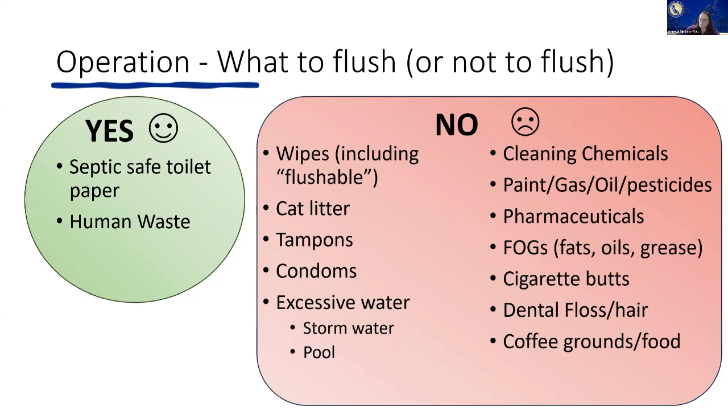You can also overload the system with too much liquid, and that's an adjustment for a lot of people. You really have to make sure you're not running baths, the dishwasher, and the washing machine all at once, overloading the system with everything you have. You also don't want to send chemicals down that will kill the bacteria, because this system is based on bacteria breaking down the pathogens and everything going on with the sewage. It's critical that bacteria stay alive so it can do its job. There are countless stories of people on chemotherapy or dumping chemicals down the drain, and the smell contractors have told me about is just horrendous. So it's really important to maintain that balance of bacteria and life in there.

We're going to continue with the operation of the system. It's important to protect the system, and that means not just what you're putting into it, but also protecting the actual physical system and what's going on outside of it. If you have heavy equipment, livestock, or farming, all of that can damage the system - the field, the tanks, even the sewer lines. So it's important to think about where things are located, not driving equipment over those areas, and keeping animals off the field.

Power outages, something we're very familiar with in California, are another concern. If you have just a conventional system working off gravity, it's not going to be much of a concern. But if you're relying on pumps, alarms, or treatment systems, then that is definitely a concern. A lot of people have moved towards getting generators.

The problem is if they're just putting a generator on their well and they're still bringing that liquid into the home, but they have a system that relies on power to get the sewage away from the home, then you're bringing it in but not getting it out. What happens is you'll have a backup and you'll have problems. So it's critical to be aware that if your power is down, make sure you are not using any pumps or similar equipment on your system unless you've put a generator on it.

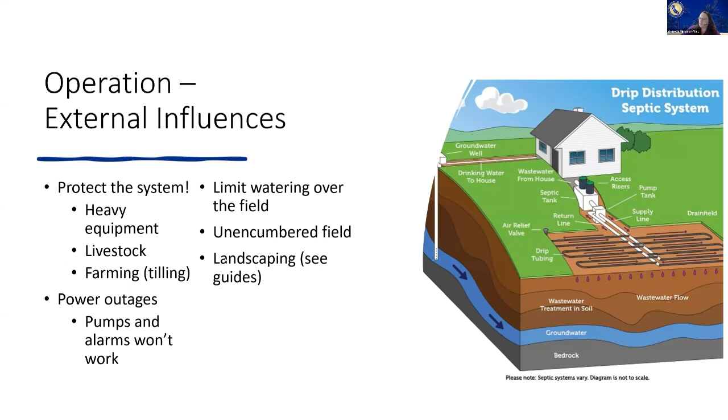You want to make sure you're limiting how much you water the field. If it's a lawn or landscaped area, don't overwater because you're already essentially watering it from within, so you don't want to add too much on top. Make sure the field is unencumbered, so don't put a deck, a storage unit, or anything on top of your fields, since the system relies on evaporation and that pressure could also be too much. Lawn and similar landscaping are fine over the fields, but don't plant trees, and it's not a good place for a potato patch since you don't want root vegetables growing subsurface where your sewage system is.

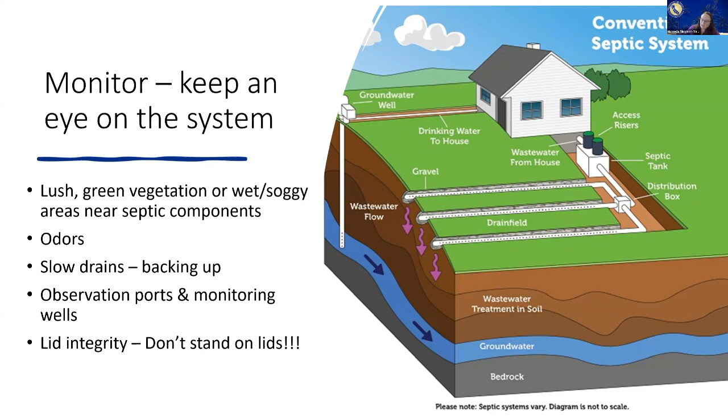Just a side note, lids, they can, over time, especially the plastic ones, break down. So as a safety element, don't stand on them. It's not a bad idea to take a look and make sure that integrity is good and that they're okay. So this is just the general monitoring.

But this leads to the maintenance. The homeowner should just kind of take a look at the whole system about every 1 to 3 years, having their tanks pumped every 3 to 5 years, depending on usage. They also want to be checking the pumps, the alarms, the floats, rinsing off filters. Now if they have a service provider, this is something the service provider will be doing. And then again, checking the observation ports, monitoring wells, just making sure everything's functioning properly.

All right, when things go wrong. As a general rule of thumb, if something's wrong, you just want to stop using the system. Make sure you call a professional, probably have the tanks pumped, have it inspected, make sure if there's any repairs that need to be done, that happens.

If you have surfacing sewage, the first thing you want to do, obviously, is to stop using the system. Try to make sure that sewage isn't running off onto a neighboring parcel, that it's not going into any kind of storm drain. Really try to stop that flow. If you can sanitize the area, you can use lime or bleach. Just try to kind of clean it up a bit. And then block it off. Make sure no one's going in that area.

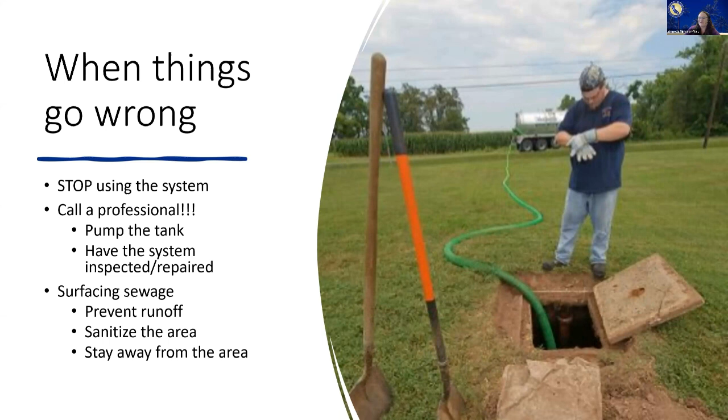You don't want to have your field overflowing and completely saturated, and then your kids run outside and start playing soccer on the lawn and they're complaining that it's muddy and the ball's wet and smells kind of weird. So make sure no one's actually getting into it, and also pets. Dogs really like to get into that stuff, as you can imagine.

So kind of wrapping this bit up, it's really important that we convince the homeowner not to become a flush and forget homeowner. They're not in a high rise in San Francisco. This isn't just going to go away and it's not their problem. It's critical that they understand that they are an important part of this, and it really is falling on them to take care of the situation if something arises, to keep an eye on their system, and of course use it appropriately. One thing that Deb mentioned that I absolutely love is that she always tells homeowners that you are the operator of the system. So they are now in charge of it. They have that power. Hopefully for most people that kind of sinks in to understand that they are in charge of it, that they need to take responsibility.

There's also the health and safety. If you have surfacing sewage, if you have sewage backing up into your house, that's not healthy. So you can really emphasize, especially if children or animals are around, you really want to make sure they understand that this is a health and safety issue.

There can be legal consequences. So if you have a bunch of sewage that is running into a storm drain or running onto your property, your neighbor's property, or you're a landlord and you're not taking care of the system and it backs up into the house of your tenants and ruins their stuff or makes them sick, that can have legal consequences. It's really important that people understand that as well.